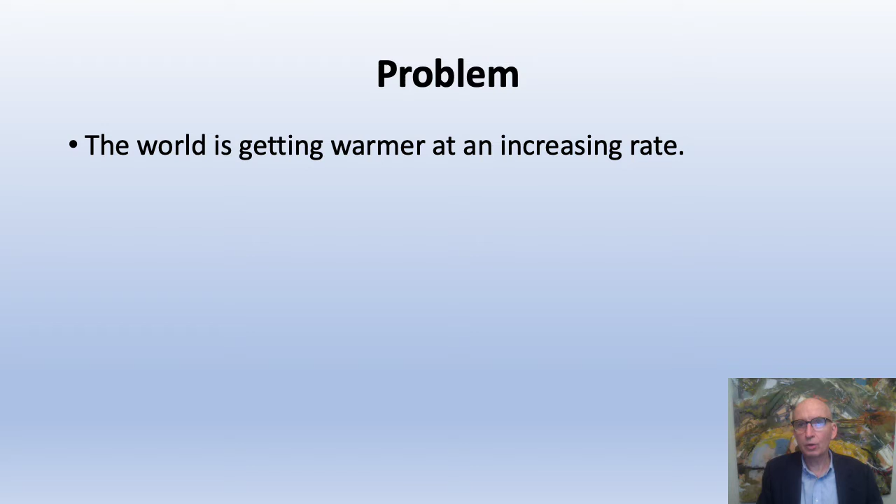The world is getting warmer at an increasing rate. Shown next is a short video segment that illustrates how the warming trend is correlating with rising atmospheric CO2 levels, and that these levels are continuing to rise at an increasing rate.

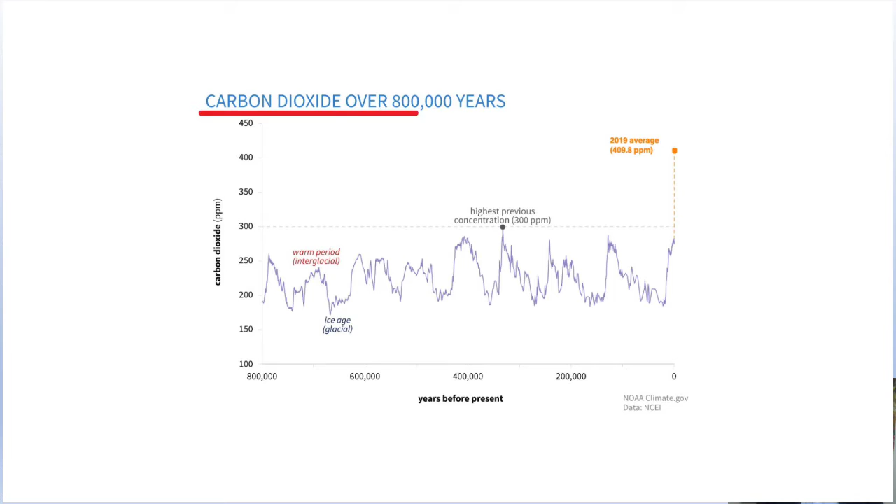The world is getting warmer and at an increasing rate. A large reason for this is CO2 levels in the atmosphere. Since the beginning of the Industrial Revolution, they have risen at an unprecedented rate. Rising CO2 levels had been correlating closely with rising global temperatures since 1880.

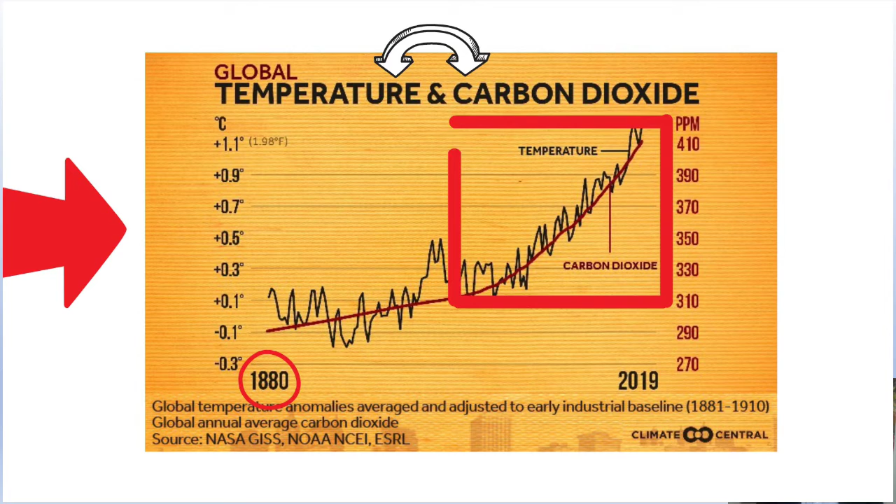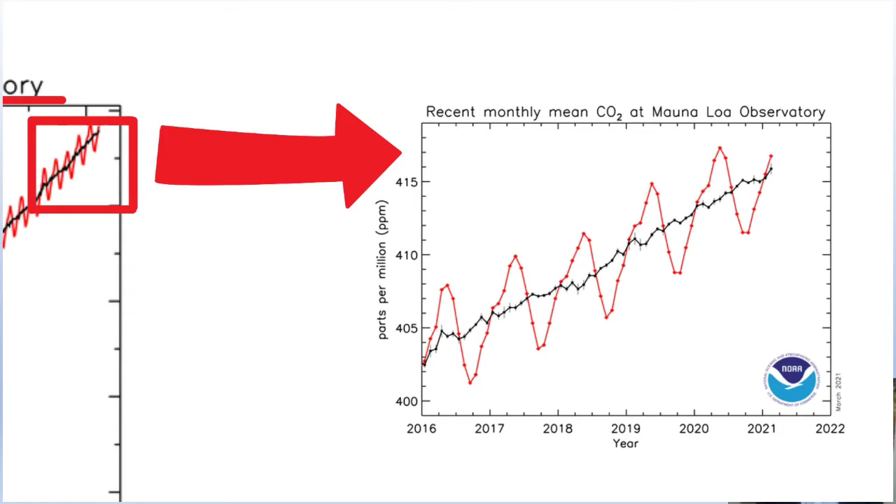This graph shows rising CO2 levels on a shorter timescale as measured at the Mauna Loa Observatory in Hawaii. On an even shorter timescale, you can see average CO2 levels have continued to rise despite a global economic slowdown from the coronavirus pandemic, which is shown by the black line. The red line on this graph shows the seasonal variations.

Why are these CO2 levels continuing to rise at an increasing rate? There are several factors contributing to this rising CO2 levels, but the main reason for this rise is that the total overall global energy demand appears to be increasing faster than the renewable energy generation growth rate.

Therefore, carbon emissions need to be mitigated on a much larger scale than what has been occurring. In addition to expanding carbon-free energy generating solutions as fast as possible, the world needs to implement carbon capture from existing fossil fuel energy sources on a very large scale.

Fortunately, there is now a proven breakthrough technology that captures 100% of the CO2 created when generating power from fuels such as natural gas, biogas from landfills, syngas from coal, and diesel fuel. It is called the Allam-Fetvedt cycle, or in less words, the Allam cycle.

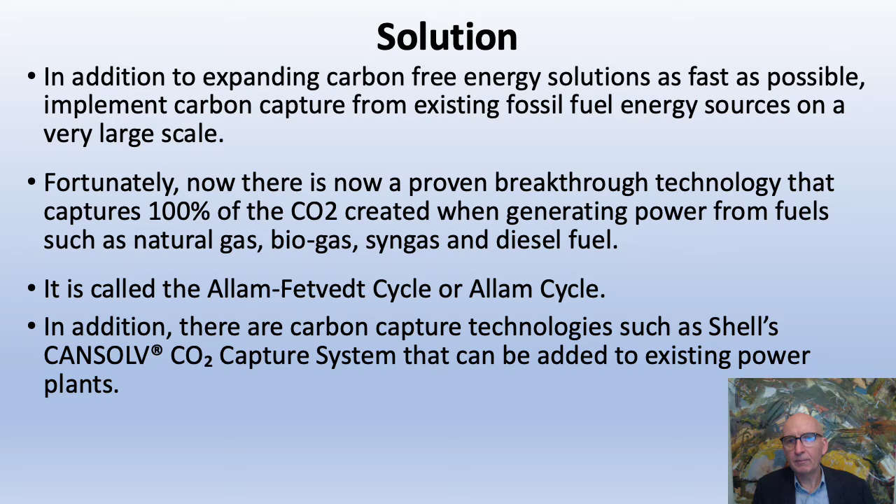In addition, there are additional carbon capture technologies such as Shell's CANSOLV CO2 capture system that can be added to existing power plants. The captured CO2 can be utilized for a wide range of uses, including vertical farming, as well as being sequestered in the ground.

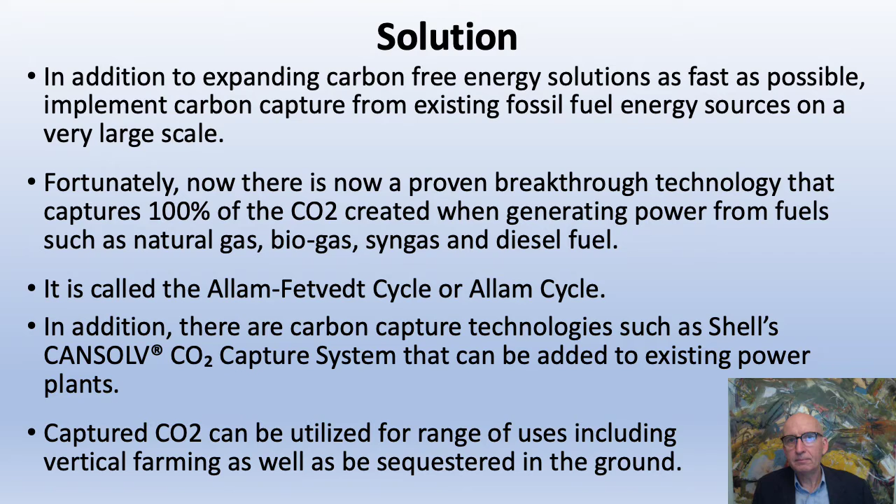The Allam cycle includes the following steps in its process. First, it burns natural gas with pure oxygen. Then the resulting CO2 is recycled through the combustor, turbine, heat exchanger, and compressor, creating relatively low-cost power with zero carbon emissions. The captured CO2 is pipeline ready and can be either sequestered or sold to medical, agricultural, or industrial sectors.

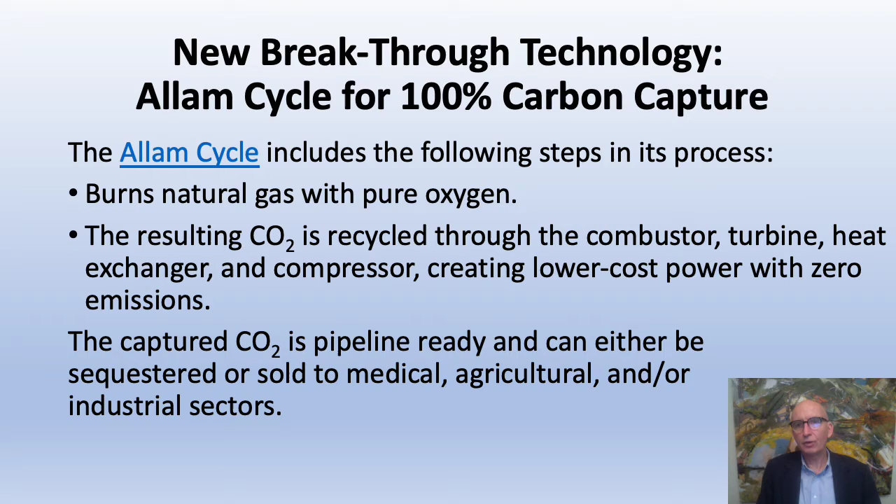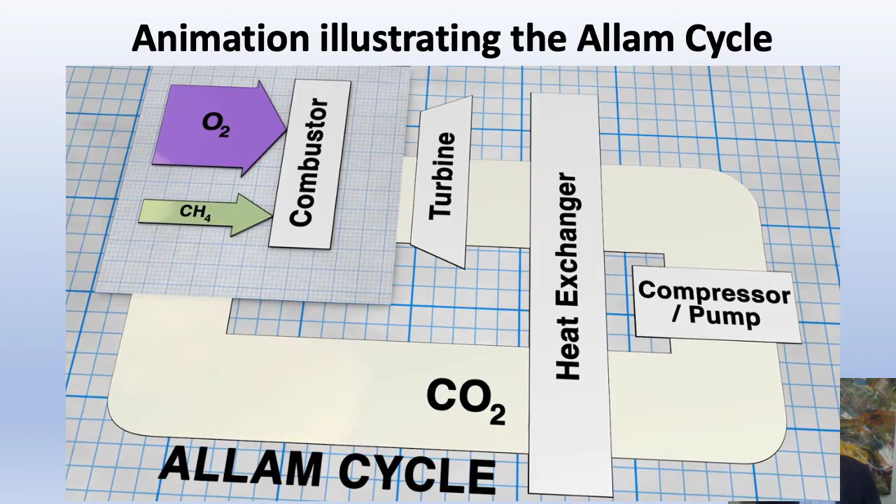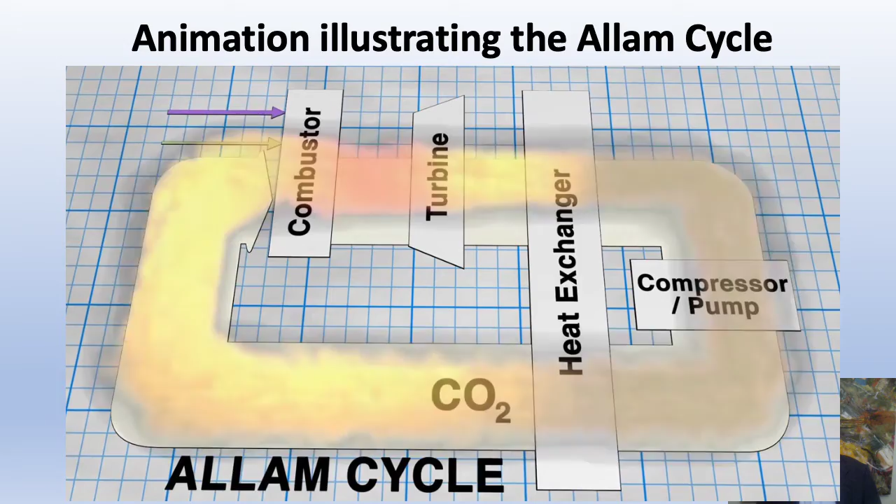Burning with oxygen, known as oxy-combustion, is typically uneconomic because oxygen is expensive to produce. Net Power overcomes this problem by recirculating the majority of the produced CO2 into the combustor, dramatically lowering oxygen requirements.

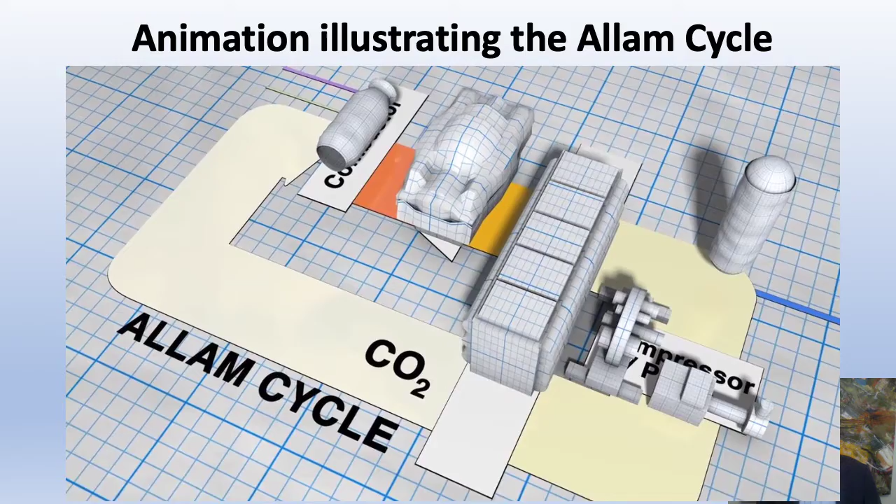The resulting working fluid of high-pressure CO2 and water is expanded through a turbine and then cooled in a heat exchanger. Water is removed, and the remaining nearly pure carbon dioxide stream is compressed and pumped back to high pressure. Excess pipeline-ready CO2 is exported before the working fluid is reheated in the heat exchanger and returned to the combustor.

This breakthrough process produces low-cost electricity, eliminates water consumption, and is emissions-free.

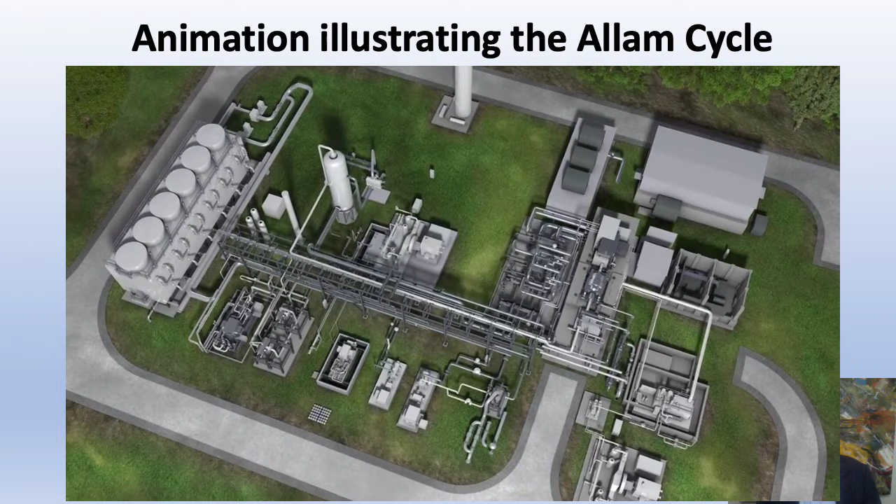The Allam cycle can be implemented on a global scale relatively quickly for several reasons. First, companies around the world can license this technology from Net Power, which is a privately held technology licensing company. The owners of this licensing company have considerable experience, capacity, and credibility in the power generation industry, which include Exelon Corporation.

McDermott International Limited, and Occidental Petroleum, or Oxy. Lastly, equipment manufacturers and contractors around the world that are currently supplying, constructing, and/or operating conventional power plants can also build and operate the Allam cycle power plants. Therefore, capacity exists for rapid large-scale implementation of this cycle starting now.

As I mentioned earlier, there are carbon capture technologies such as Shell's CANSOLV CO2 capture system. This system is now in use in many locations and is declining in cost. It can be added to existing power plants to enable carbon capture on a large scale.

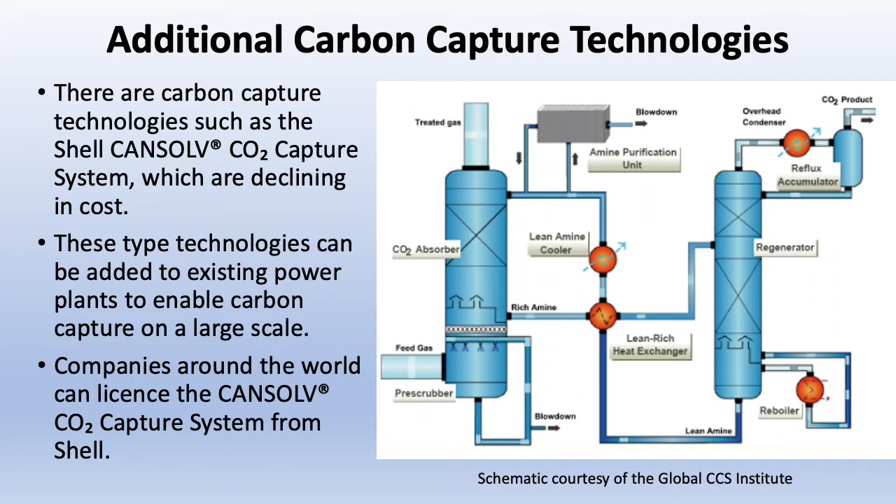In a similar way as the Allam technology can be utilized, companies around the world can license the CANSOLV system from Shell. Initially, CO2 captured from these power plants would be mostly sequestered in the ground. However, once there is a reliable source of low-cost CO2 available, this CO2 can be used for many other uses, including accelerating plant growth in indoor farms, strengthening concrete building materials, and production of carbonated beverages.

There are several sequestration options for CO2 captured from power plants. This includes injecting CO2 into oil and gas fields, into basaltic formations, and into salt caverns.

Carbon dioxide can be captured from power plants using the Allam cycle, and can be complemented by other sources that use other carbon capture technologies. For example, carbon dioxide can be captured from existing cement plants and combined with carbon dioxide from power plants in the same pipeline for transfer to long-term storage or for utilization.

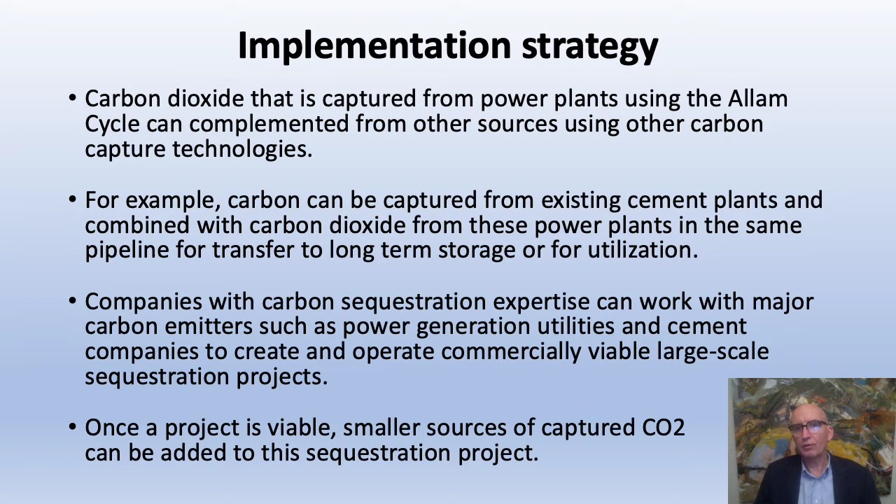Companies with sequestration expertise can engage with major carbon emitters such as power generation utilities and cement manufacturing companies to create and operate commercially viable large-scale sequestration projects. Once a project is viable, smaller sources of captured CO2 can be added to this sequestration project.

Power plants combined with carbon capture can help make an electricity grid that is also powered by renewable energy farms more reliable. For example, if wind power is not available for a few days, these power plants can provide the needed electricity. Since a power plant using the Allam cycle is very efficient and captures 100% of the carbon dioxide created, it can also be used during low demand periods to power direct air capture of carbon dioxide from the atmosphere. If this was done, this power plant would have a significant negative carbon footprint.

There is some impressive new technology coming available to enable low-cost carbon capture from the outside air. For example, Carbon Engineering has developed an effective way of doing this and have made considerable progress in reducing the operating cost of this process.

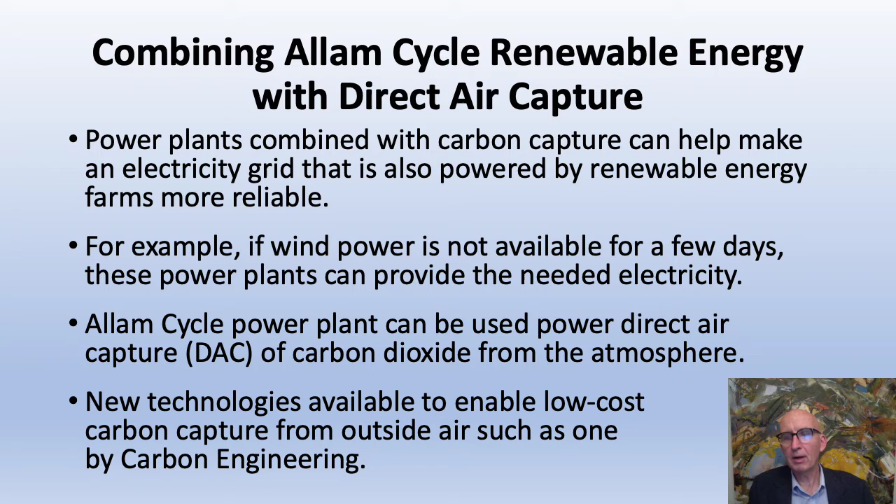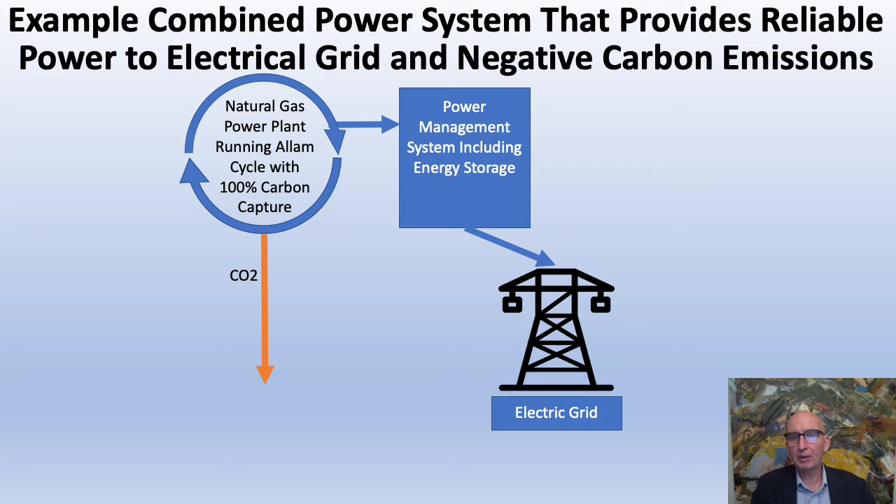To help manage the power more effectively, this power management system includes energy storage to manage short-term power peaks and shortfalls. If a substantial amount of power is reduced for a long period of time, such as if there is no wind power for a few days, the power management system reduces the power to the direct air capture system of carbon dioxide. In this way, the power management system can maximize the reliability of the power to the electric grid.

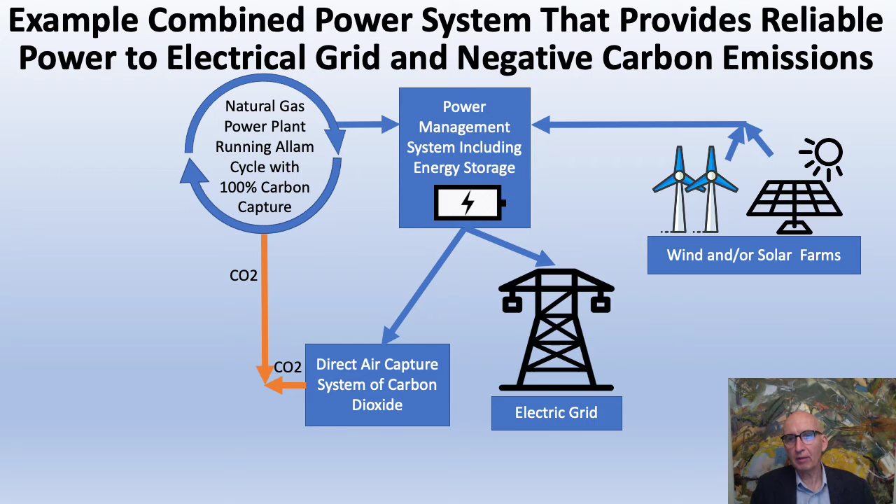The carbon dioxide that is captured from the power plant or direct air capture system can be utilized in beneficial ways, such as accelerating growth of food in a vertical farm, or be sequestered in the ground.

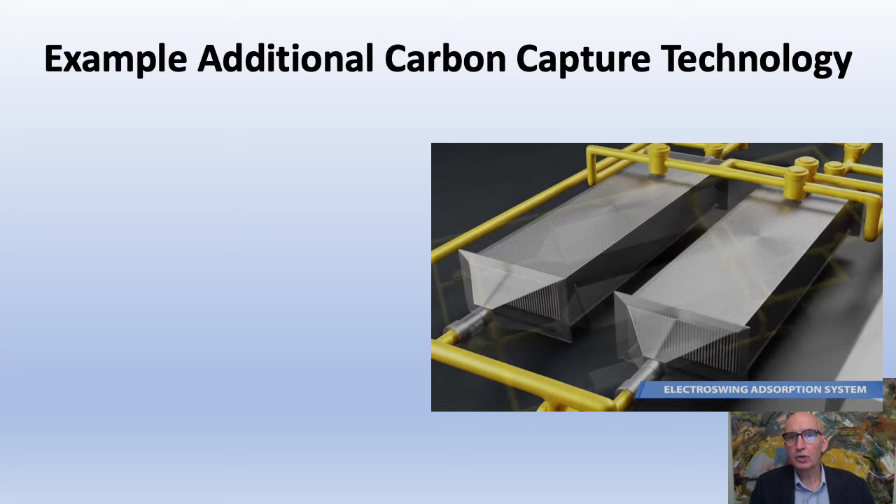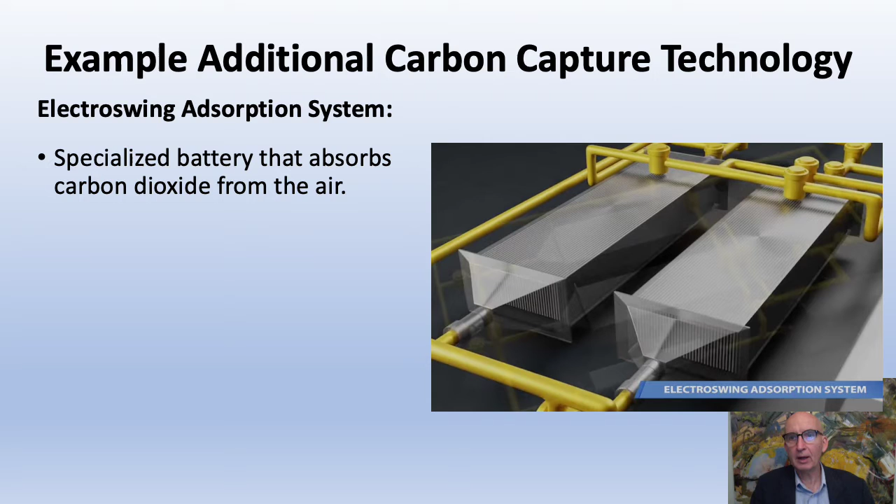There are several other carbon dioxide capture systems available or under development. Shown here is a very promising one called the Electroswing adsorption system that is being developed by MIT. It is essentially a large specialized battery that absorbs carbon dioxide from the air or other gas stream passing over its electrodes as it is being charged up, and then releases the gas as it is being discharged.

In operation, the device would simply alternate between charging and discharging, with feed gas being blown into the system during the charging cycle, and then pure concentrated carbon dioxide released during the discharging cycle.

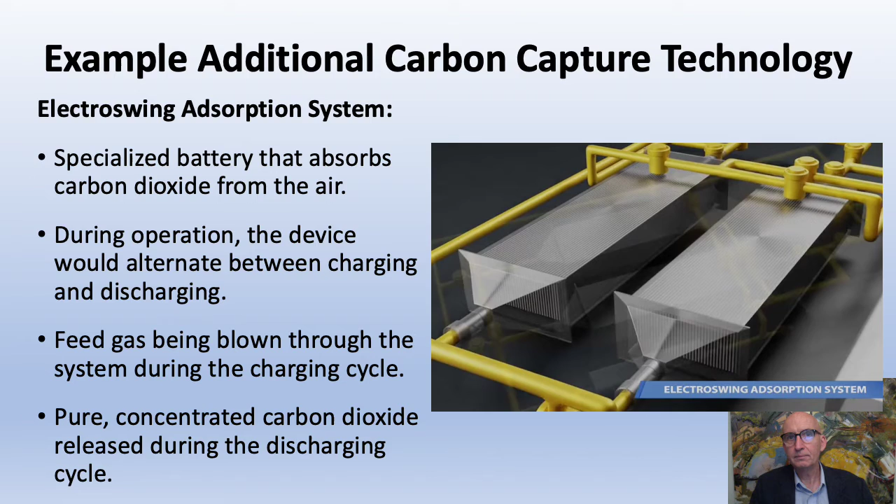If this combined power system was implemented in many locations around the world, the scale of the impact on reducing carbon emissions would be extremely large, likely in the range of billions of tons of CO2 per year.

Green bonds, which are growing quickly and totaled more than $295 billion last year, can be an effective way to finance these combined power systems. Shown next is a simplified flowchart illustrating how projects using this type of combined system can be financed.

Typically, green bonds are issued once a project is operational and generating income, so bridge financing is normally needed to construct and commission these combined power systems. This bridge financing normally includes at least two components. The first is the equity component, provided by the owners of the project and the respective investors. The second component is a bank loan by one or more financing institutions, like the Canada Infrastructure Bank.

When the green bonds are issued to repay the bridge financing, they can be promoted to financial firms that are likely buyers of these bonds, such as the firms that have joined the Glasgow Financial Alliance for Net Zero, which have a combined total of over 70 trillion US dollars under management. Therefore, there are existing financial mechanisms and capital available to finance a large-scale implementation of these combined power systems around the world.

In addition to the Glasgow Financial Alliance for Net Zero, there are other climate finance initiatives that include firms that would likely purchase green bonds to finance these types of combined power systems. For example, there is the Institutional Investors Group on Climate Change, which includes firms that have over $54 trillion in assets under management. Secondly, there is the Climate Action 100+ initiative, which includes firms with over $35 trillion in assets under management. And finally, the Coalition for the International Platform for Climate Finance, which includes firms with over $7 trillion in assets under management.

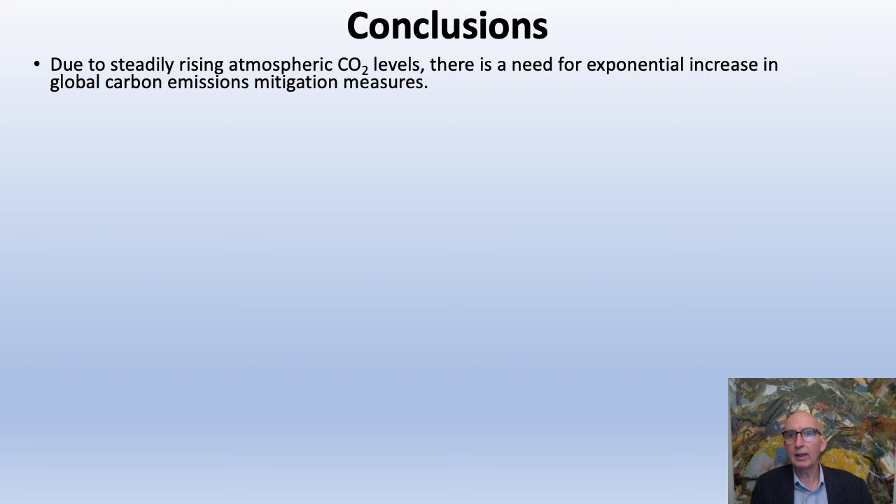In conclusion, due to steadily rising CO2 levels, there is a need for an exponential increase in global carbon emissions mitigation measures. There is now a proven breakthrough technology that captures 100% of the CO2 generated when generating power from fuels such as natural gas, biogas, syngas from coal, and diesel fuel. It is called the Allam cycle.

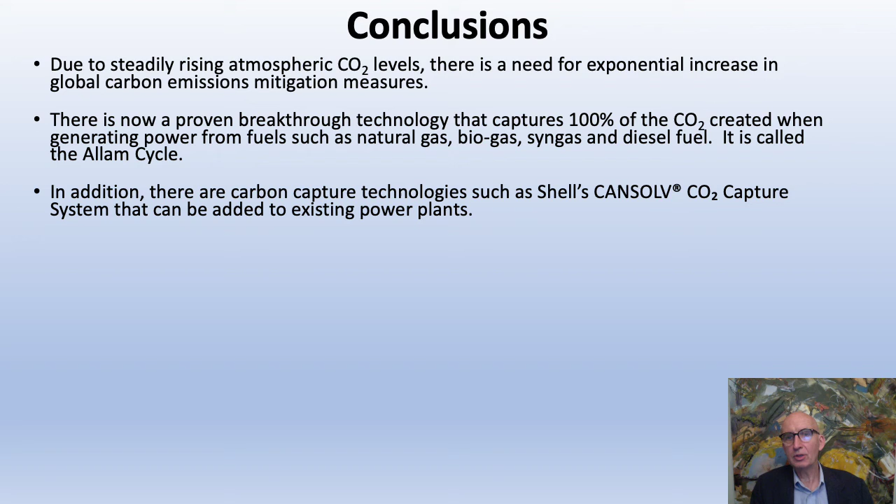In addition, there is carbon capture technology such as Shell's CANSOLV capture system that can be added to existing power plants. The CO2 captured can be utilized for a range of uses, including vertical farming, as well as sequestered in the ground. Power plants with carbon capture can be combined with renewable energy farms to produce more reliable power to the electric grid and generate negative carbon emissions.

This solution can be financed on a global scale with green bonds that are purchased by firms that have joined the Glasgow Financial Alliance for Net Zero, which have a combined total of over $70 trillion under management. This solution helps governments, companies, and workers that depend on income from fossil fuels to profitably transition to a low-carbon economy, which is critical for their support.

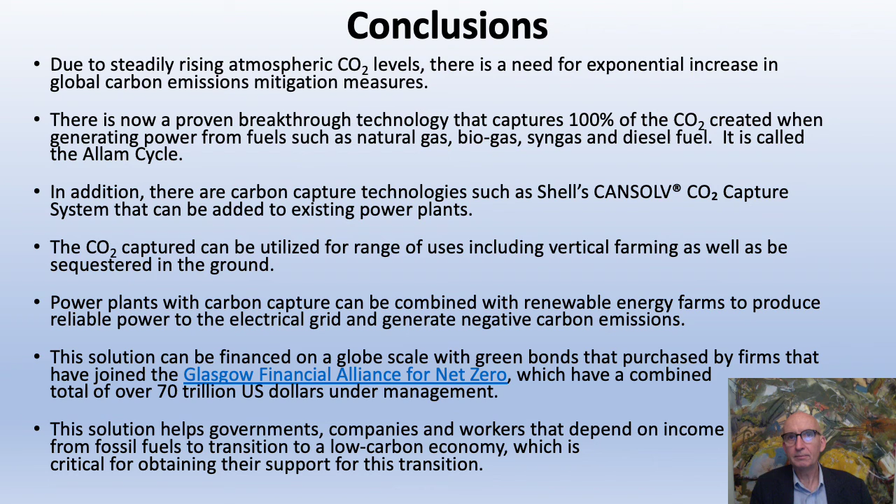To help catalyze the implementation of this opportunity on a global scale, we recommend the following. First, invite independent groups such as Drawdown and the Center for Climate and Energy Solutions to work together to estimate the full potential impact of implementing this opportunity on a global scale. Since organizations like IEA have already estimated the potential impact of some carbon capture technologies, this estimate can build on work already completed and take into account the latest technologies and strategies to accelerate carbon capture and storage globally.

Second, inform companies in the oil, gas, power plant, solar energy, wind energy, and energy storage sectors about this opportunity, which can bring them many billions of dollars of funding. Third, inform financial institutions that facilitate the issuance of green bonds of this opportunity, which will likely enable them to generate hundreds of millions of dollars in fees doing this work. Lastly, respond to the recently published concerns about carbon capture, utilization, and storage by about 500 organizations to help build broad-based support to implement this opportunity on a global scale.